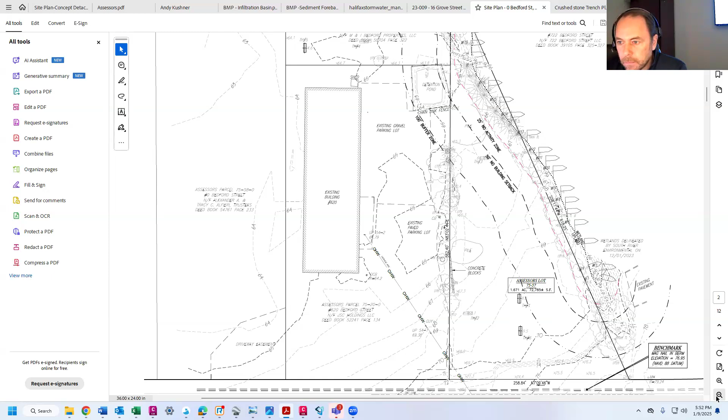You can see the dotted line and the flags delineating the resource area. You can see the tree line. We located individual trees along the tree line and also some of the canopy there. So the amount of vegetation on this lot is limited, and the rest was gravel and piles and stockpiles and landscape.

So the applicant's initial submittal included a building in the rear here and a driveway that went through to the rear. The applicant has decided, for business purposes and also working with the planning board, to eliminate this. So we're proposing less work in this vicinity, which also is a pinch point for the wetlands resource area.

The 25 foot no-activity line is demarcated by this red line here. We're proposing no work within that zone. Work within the 100 foot buffer, which is this line here, includes the construction of the access driveway, parking, a portion of this building, this corner here, and utilities, which I'll get to momentarily.

The site is flat, pretty much, except for up at Bedford Street. So Bedford Street is at elevation 76, and then the site drops off to 70. So it drops 6 feet, pretty much right at the front of the lot. So we need to build the driveway over here to gain elevation, or reduce elevation, to get down to the site and help try to minimize the fill.

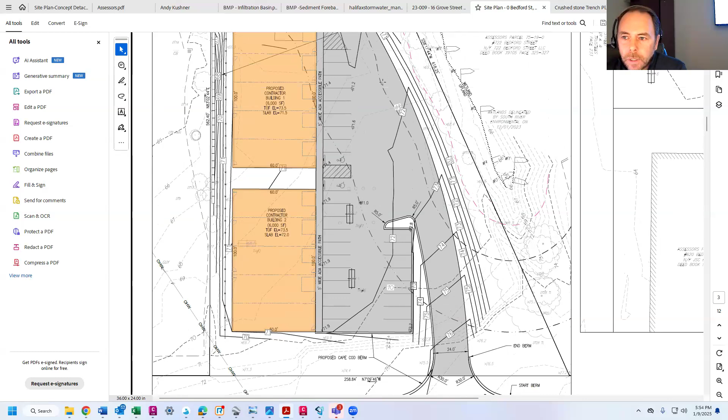As you can see, there is some contouring along the edge here. We do need to fill the site for both accessing from Bedford Street and also for the construction of stormwater and utilities.

Just wonder if I had a separate... Okay, so the utilities include town

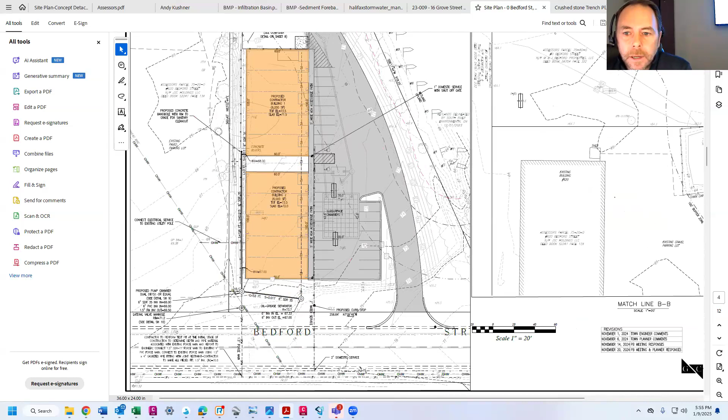Sewer comes out over here, which is outside the 100 foot buffer zone. Water is in the middle of the lot. They have a 2-inch water service here, also outside the buffer zone. Electric is overhead off of a utility pole here.

So there's the utilities. The stormwater drainage system, which we reviewed with Greg and the planning board, consists of a few catch basins. Stormwater from the parking lot is routed to these catch basin inlets, shown with red squares, which I believe are probably silt bags for during construction. Then it's routed through manholes, an oil and grit separator, and a subsurface drainage system with an overflow that goes out this way and discharges to the rear of the property.

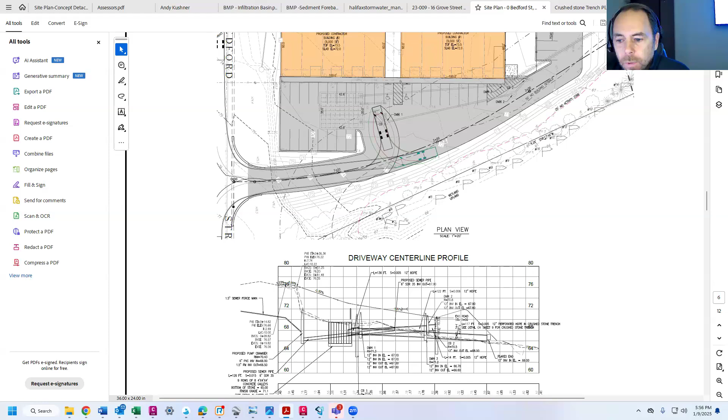Next sheet is a profile for constructing the driveway and utilities. It's more for contractor construction purposes. Landscape sheet.

We are proposing some decorative landscape out at the entrance, typical grasses in the front here. Then the rest of it is crushed stone. This hatched area here is all crushed stone. The applicant would like to do as little maintenance as possible, so he's looking for more of a zero maintenance type landscape around these commercial buildings. There will be a weed barrier, and then basically crushed bluestone or some sort of crushed stone around the buildings.

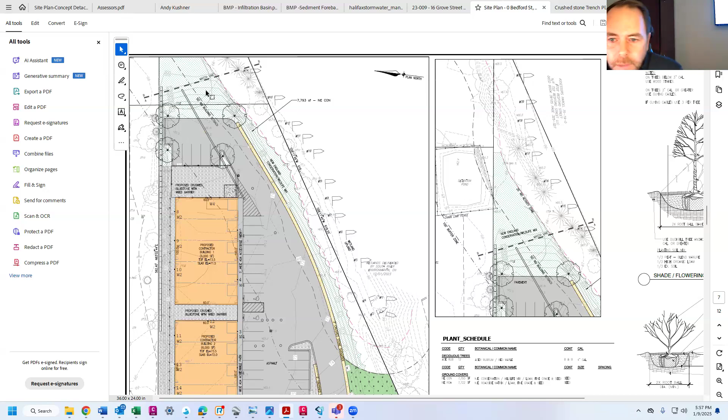This dotted light green hatch is New England conservation mix. Between the proposed development and the existing tree line resource area, we're looking to put in New England conservation mix, which would be good for habitat, site stabilization, etc. And you can see the rear of this—basically this whole area is void of vegetation, and that's going to be loamed and seeded, so we get good site landscape coverage and stabilization of the lot and vegetation, habitat, etc.

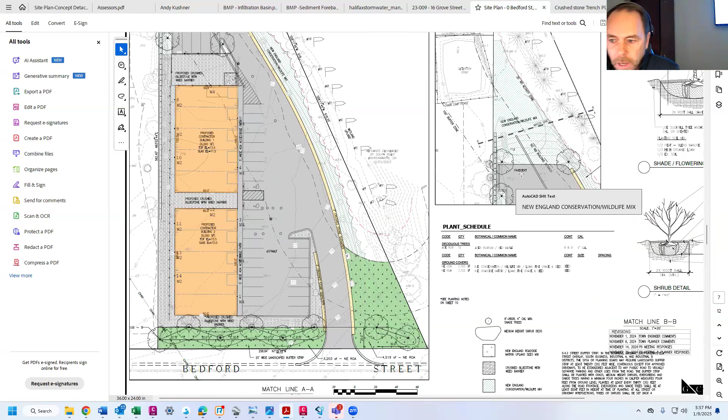Then we have—can I ask a question real quick? Sure, absolutely. In the plan you just had up, what is the yellow, along the border of the driveway parking lot area? What's the yellow? It's a crushed stone shoulder.

So we just need a shoulder over the edge of pavement for bad drivers, I guess—you got to give them a little room for error there. It's a 24-foot wide drive, and then you have 3-foot shoulders on each side, so 30 feet. This isn't going to be a major large truck access type business. This is more of a carpentry type business that's proposed currently. There are multiple uses allowed in the zone, so that could change, but that's the intention at the moment.

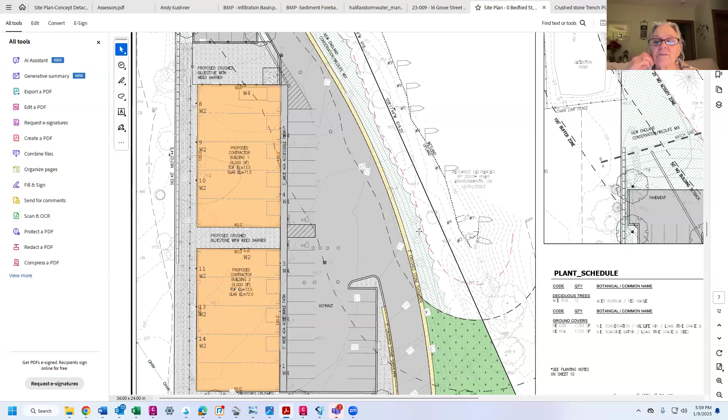It doesn't look real big for big trucks being able to pull out there. I was just curious, like what's at the top of where the elevation begins to go down? What's stopping anybody from going off the shoulder of the driveway? Understood, that's good, thanks.

Again, details for construction, pre and post development plans for the stormwater. It's been reviewed with the planning board. We've closed the planning board hearing. They've issued their approval with conditions.

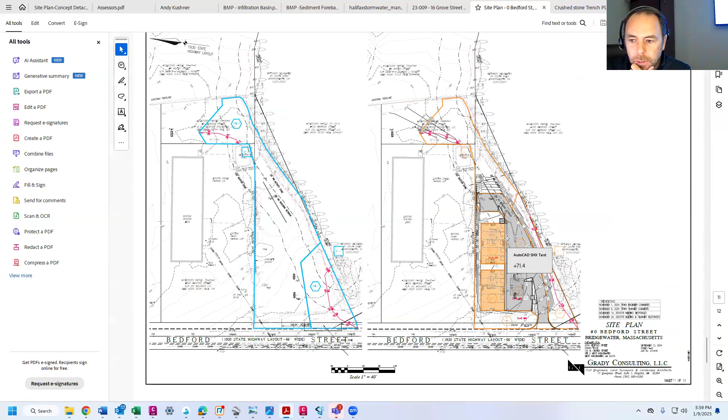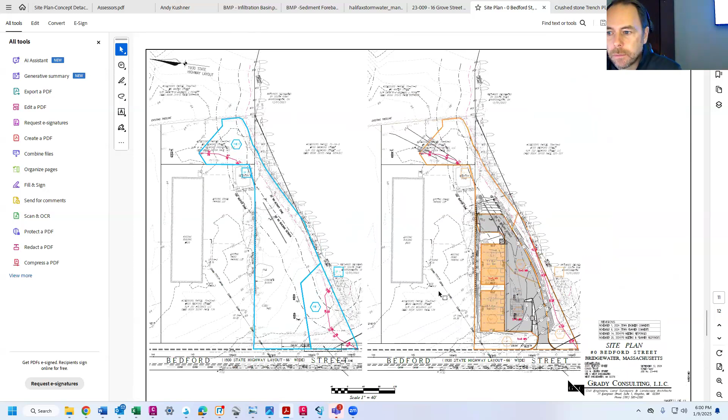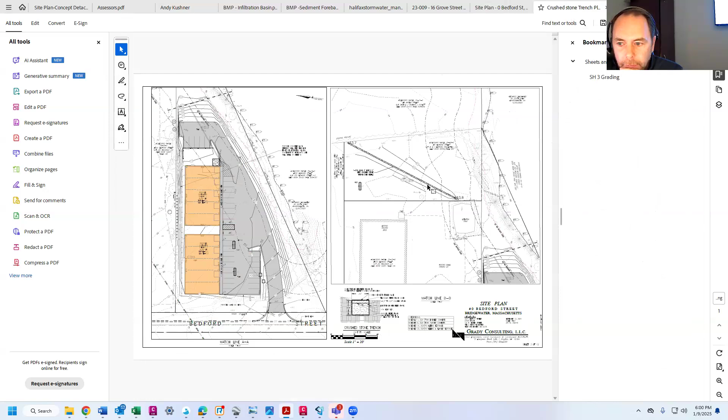In this back triangle, we worked with the planning board and this abutter here. This drainage basin overflows to the back, and they were concerned that the grading here was blocking this from being able to outlet. So we worked with the planning board and added a crushed stone trench in this area, and that was one of their conditions of approval. We submitted that to them as well. That should clear up any of that.

I think the project as presented is an improvement to the site and meets the wetlands protection requirements, and doesn't have any adverse impacts to the resource area. So I'd be happy to take any questions.

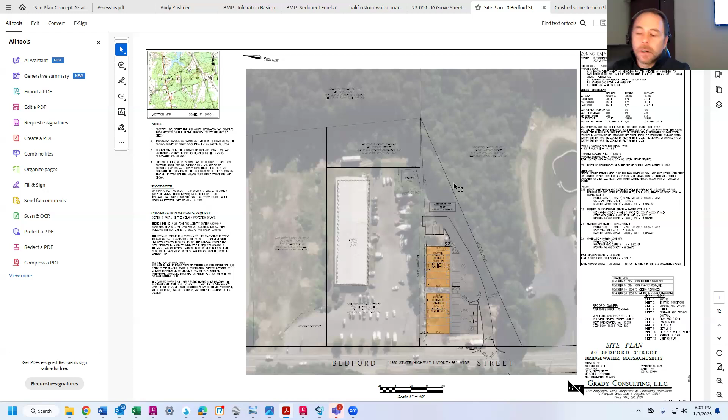Oh, we do have erosion controls too, Jen. We have a silt sock along the bottom of the slope here, between the work and the resource area. We have silt sacks in the catch basins after they're put in, until slope stabilization. We also have a construction entrance.

Great, thank you. Nice job, thank you.

Okay, so let me ask Caitlin, do you have anything you want to say with this, or add to it? I think you went out there with Marilyn, maybe, I'm not sure.

Yeah, Marilyn and I went out there yesterday just to verify the wetlands line, and we didn't have a problem with it. Everything looked good, so I don't have any concerns.

Marilyn, I don't know if you have anything more to add. You're muted.

Sorry, my husband was burning something out there. What are you burning?

No, I went out there with Caitlin, no issues, solid wetland line, I verified the wetland line, no issues with the wetland line at all. And it sounds like and looks like they did a good job making changes with our planning board, so I really don't have any issues on this.

Harry, do you know the area? Do you need to go out and take a look, or any questions? You looked at it, okay, alright. So I don't have anything further.

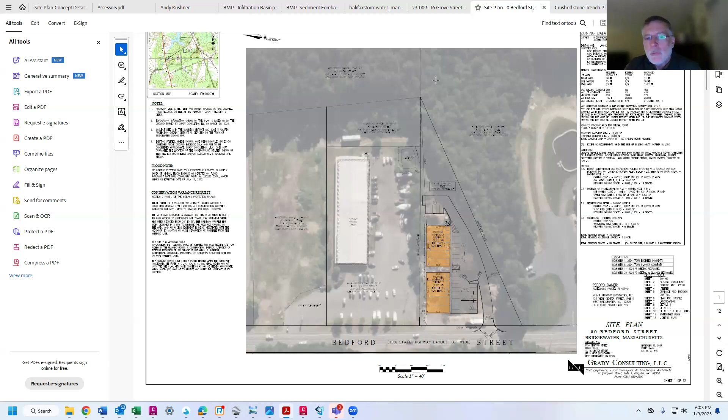I did review it with the planning board, and there were a few iterations that Grady Consulting tweaked and modified, and all the comments were satisfied, and the planning board approved it, so I don't have any issues with stormwater. I saw your letter to Pat Driscoll. So, from an engineering point, from a wetlands point, I think it looks good, done. I don't have any issues.

If you want to open it up to anybody else. Do we have any abutters on that would like to share a thought or a concern or have any questions? You can use the raise your hand feature or wave at Caitlin.

I'm not seeing anybody, Chair. Okay, great, thanks. So commission members, do we have enough information to close the public hearing?

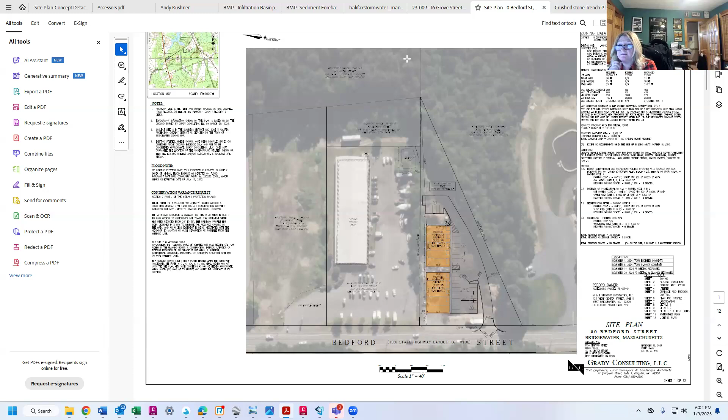I think we do. I will make a motion to close notice of intent, 0 Bedford Street, map 75, lot 57. Second. Thank you, Harry. Roll call vote: Marilyn, aye. Harry, aye. Myself, Wendy, aye.

And now we need a motion to approve. I would make a motion to approve notice of intent, 0 Bedford Street, map 75, lot 57, with standard conditions. I don't see anything that we need to elaborate on. Second, thank you. Roll call vote: Marilyn, aye. Harry, aye, thank you, and myself, Wendy, aye.

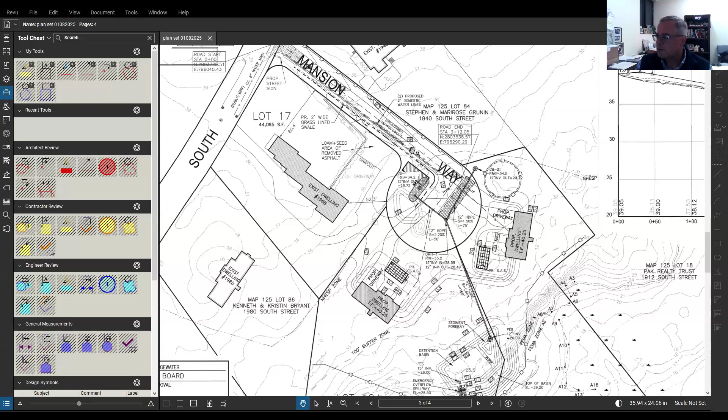So just to reiterate, folks, Mansion Way was the approved roadway, a cul-de-sac layout. It created these 2 lots that I'm moving my cursor over. The previously approved detention basin was right between the 2 houses, and as I said, it greatly impacted Mr. McLeod's daughter's lot, who's over here. So what we did was take almost that exact same detention basin and shifted it further towards the back, downstream towards the BVW, still outside of your 25-foot buffer zone, but further away just to allow a little bit better of a lot for this lot over here.

The buffer zone is shown. As I said, the home construction is by no means final in these lots, and we fully intend, certainly on this lot I'm highlighting, to have an individual filing with the commission once the homeowner decides exactly what they want for home size and placement. So again, it was just there for informational purposes. But that's all we did. We essentially kept the roadways in the exact same location. The roadway layout is the same, and the drainage just goes down the lot into a detention basin similar to what you folks had already approved.

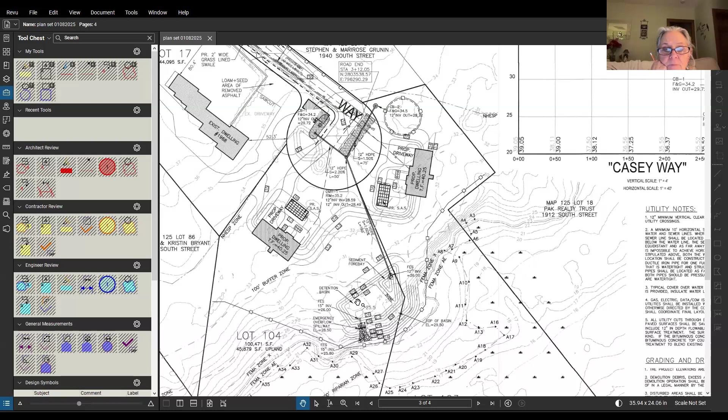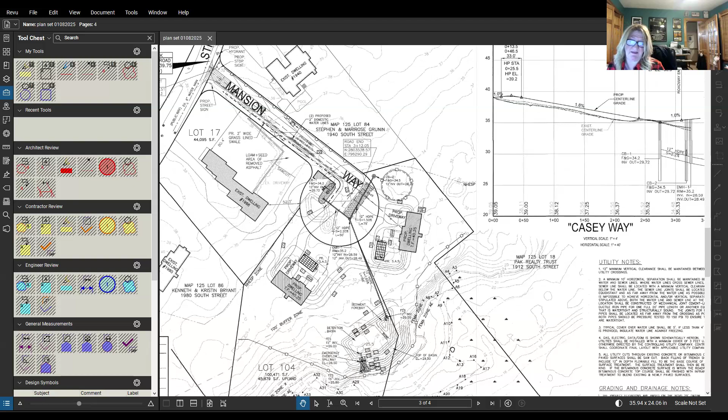Yeah, I was out there with Caitlin and we took a walk around, and what I wanted to do was get a jump on the wetland line, because we verified there was an ANRAD on it and it expired. So we took a good look. The only thing is, I'm having problems with a couple of the flags. It was a tough day - one, you can't see vegetation, two, you couldn't even auger, it was freezing. So just around those flags, like A30, A29, I'm going to need a closer look, and that's where you get close with that detention basin with the 25.

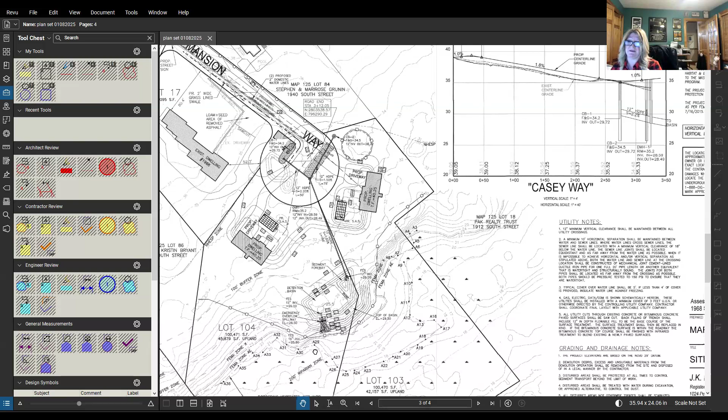Parts of it are very clear to me, but if I can't be 100% certain, I don't want to make the call. So I would like a second set of eyes to go out and take a look at that area.

Harry, are you there? I'm here. Is that something you can go down and take a look at with me? Yep, okay, figure it out. If Harry can go with me, that would avoid us pulling in a wetlands person just to take a look.

I definitely just wanted a second set of eyes, and we'll continue this for one meeting. I was trying to get a jump on it for you and just got snagged on those couple of areas. That's fine and understandable. There's a pretty good slope there, definitely some uneven terrain. As I said, it lines up almost perfectly with Ken Thompson's, but even if there's a small adjustment, it doesn't really affect us all that much.

We could certainly move the basin further from the wetland if need be. I understand, Marilyn, if we can get that done before the next meeting, and if you folks find that there's a small adjustment to be made, we don't have a problem. If we feel we need to move a flag, with good faith, I didn't want to make that call on my own. I wanted a collaboration when I have an issue.

If it's a straight line, there's no problem. So I'll take Harry down there before the next meeting and we'll do a good look, especially at that area that me and Caitlin were talking about, A29, when you got in a little closer. That was where my area of concern was.

Hopefully it's warmer than it was yesterday when you go back up. I don't even know why I took the auger out. It would have been a good day to call in sick, to be honest. It helped you down the slope though. It helps to get on the slope, so it's a good crutch.

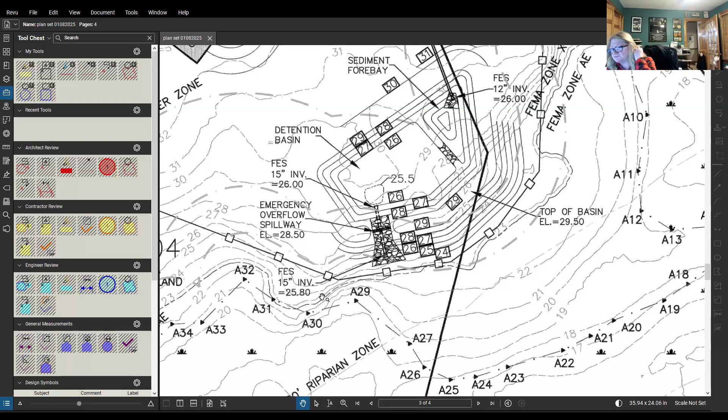Was Greg on here for this project too, or was he good? I don't see him anymore. I guess he's good.

I had a few comments. I think they met the 44% TSS requirement with the infiltration drain and other drainage things going before it goes into the detention basin. Even though it's a 2-lot subdivision, it is near an outstanding water resource and natural heritage habitat. My question is, did they have informed natural heritage?

Yes, we did. We sent them the package, and we just got a blessing from them yesterday, or the day before, a clean bill of health from them this week. Nice, and I believe I forwarded that to Caitlin. You did, I added that in the shared file for you, commissioners.

And I don't know if Mr. Faria saw my comments. I did not. Oh, you didn't? No, okay. I had one other comment about CB2.

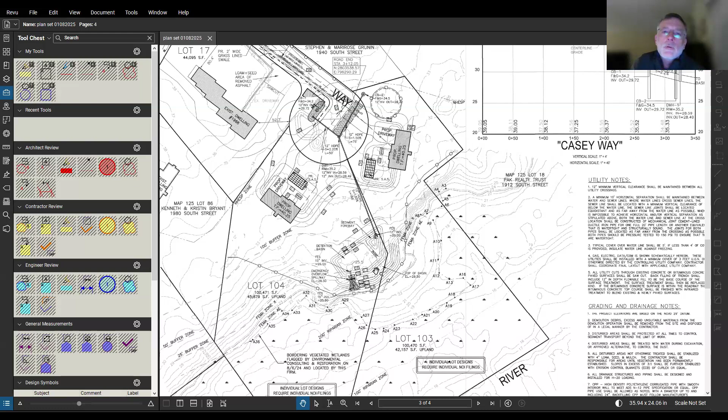CB2 is located in a watershed. If you looked at the watershed plan, that watershed bypasses the basin, but with that catch basin where it is, part of that watershed would get routed through the basin. I believe that was pretty much the only thing I had.

All right, we can certainly take a look at that and make an adjustment if we need to. That would be fine.

Thanks, Greg. I think we're good. Do we want to make a motion to continue? We need to check with abutters first. Any abutters have any questions, concerns, or thoughts?

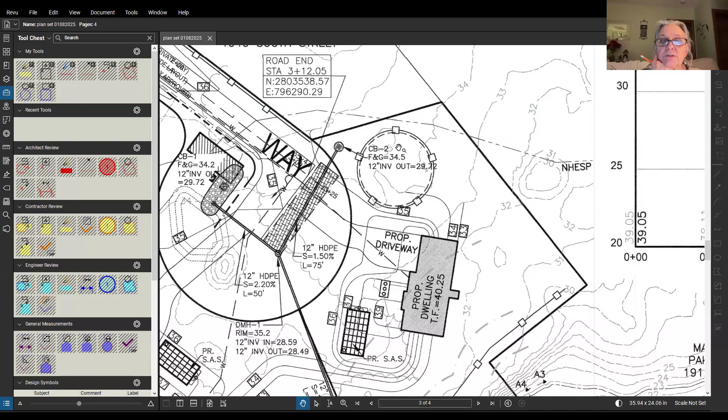Melissa Raymondetta, Lakeside Drive, Bridgewater. I just have a question because this is riverfront area, right? But it's being referred to as wetland buffer. Don't we have a 200-foot riverfront area here?

If I could address that, Madam Chair - the riverfront area was delineated. There's a 100-foot riparian zone and a 200-foot riparian zone. The 200-foot riparian zone, in most cases, falls within the BVW. So the commission's 25, 50, and 100-foot buffer zones are more restrictive than the 200-foot riparian zone in this case. Not always the case, but in this case, that's what happened. So we're nowhere close - we're not doing any work at all within the 200-foot riverfront area. Excellent, thank you, Scott. Yeah, they're completely out of it.

It's a good question. We had another South Street case that was a touchy thing with the river. Anyone else have a question, concern, or thought? I'm not seeing anyone, Chair.

All right, then I would make a motion to continue to the next meeting, 1/23. Myself and Harry will get out there on that line.

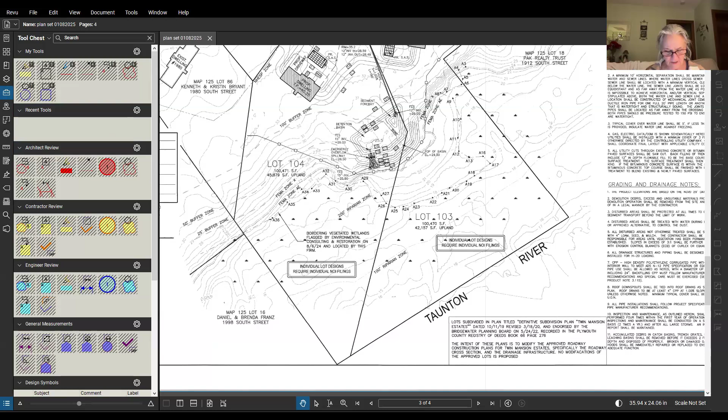All right, next up we have Conservation Commission business, administrative items. We have a certificate of compliance for 283 Vernon Street, map 85, lot 21. Applicant representative is Paul Laporte, Collins Civil Engineering Group, and the DEP file number is SE 116-1553.

I don't know, Caitlin, do you want to say anything? Usually the COCs have already gone through everything and all is good, but I'm just not sure on this one. Yeah, this one is all set. Both of them are complete for COCs on our end, so we're good to make a vote.

Can I have a motion to accept? We will make a motion to issue certificate of compliance, 283 Vernon Street, map 85, lot 21. Did you second, Harry? Harry second. I meant to say accept but corrected myself to say issue. Harry's on a roll with the phone, seconding right there.

Do we need a roll call vote? Yes, we do, of course we do. Marilyn, aye. Harry, aye. Myself, Wendy, aye. All right, excellent, certificate of compliance 283, done.

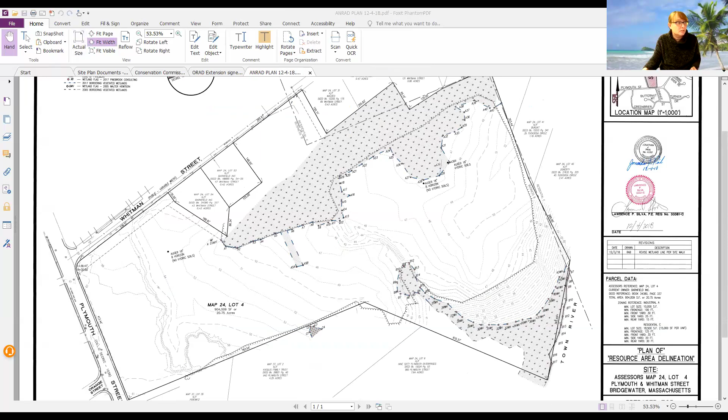If you all haven't read it or didn't know about it, I can show that to you too. Would you like to see that? Yeah, I know she extended. Right? Good. Yep, I'm good with it. So we're good with that? Yeah, okay, so I'll just put it on the screen anyway.

So any permit in existence between January 1, 2023 and January 1, 2025 is now extended for a 2-year period, in addition to the lawful term of the approval, but we're just looking for 2 years.

Okay, but now I get confused. Aren't you already technically extended for 2 years with the new governor's thing? Yes, but we just want our blessing. We did this 2 days before she issued it, we requested this 2 days before she issued it. So we're already here, can you just bless it and then we can move on?

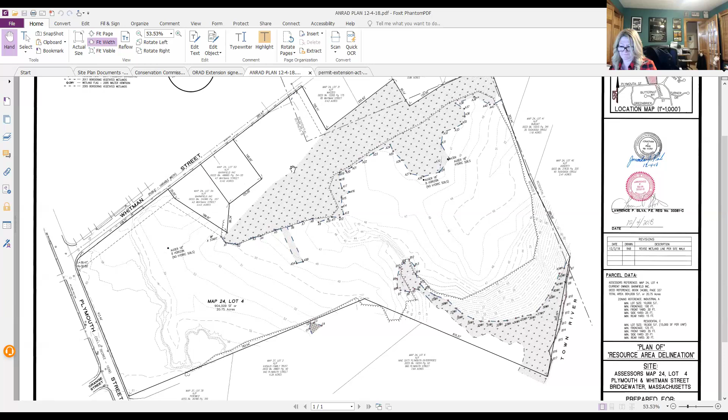Yeah, I don't have a problem with extending it. I don't either. Yep, hold on, let me make a motion with the exact thing on it. Oh, it's 0 Plymouth, ANRAD extension for 0 Plymouth. Second. Thank you, okay, Harry.

And that would be, we'll close, well, it's not a hearing anyway, we'll just do it for 2 years. So 0 Plymouth extension request for 2 years, and we got a second on it, so roll call vote.

Yep, roll call vote: Marilyn McDonald, aye. Harry Bailey, and myself, Wendy Smith, aye. Thank you, all set.

Thank you for providing that. That brings us to January of '27. Don't say it. I retire in '27. I'm very excited. Excellent. We'll have this conversation again when you retire.

Oh, okay, so you're all set with the extension then. Thank you, thank you, thanks Rebecca. All right, Happy New Year. Thanks, you too, Happy New Year. I beat you to it, Marilyn. I know you did, I did.

Okay, so next up we have Lake Shore cease and desist, Marilyn or Caitlin, either one of you. Caitlin, maybe? I'm a little confused on it too. Yeah, so I can touch on this.

So our last meeting in November, I wasn't here, but Bob had mentioned possibly taking the route of issuing a certificate of non-compliance and then having to file a new NOI to have a fresh application and do another set of order of conditions. However, I wasn't really sure if that's the way we should navigate it.